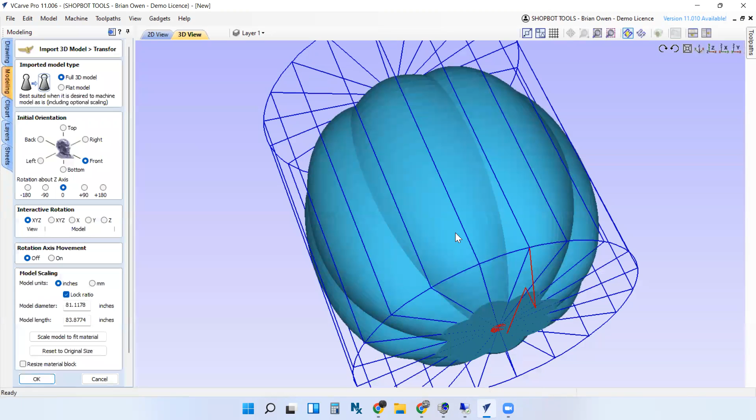I've actually gone out and found a 3D model of a pumpkin online for free, and I'm going to use that as the basis for my carving. So my first step is to import my pumpkin model. Here it is right here, and that opens up the 3D file import dialog. I'm going to scale this model to fit my material, to fit inside my 10 by 10 cylinder, and then hit OK to import my model into VCarve.

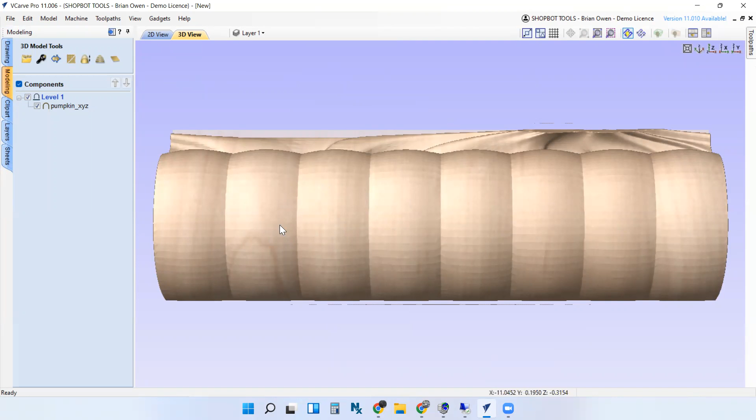So this doesn't look quite like a pumpkin, it kind of looks more like a caterpillar, but that's because the way VCarve interprets 3D models is it takes them, unwraps them, and lays them flat on a work area so you can plan out your cut. Then when you actually save the cutout, it wraps the cut back around a cylindrical shape and creates a rotary toolpath file. So all the cutting I'll be doing is on the surface of this unwrapped pumpkin shape.

The first thing, just to help with visualizing the shape we're carving into, I'm going to pretend like I have to cut this pumpkin shape out, which you wouldn't have to because your part would already be in the shape of a pumpkin. But I'm going to calculate a 3D finishing toolpath to create the pumpkin shape that we're going to carve into.

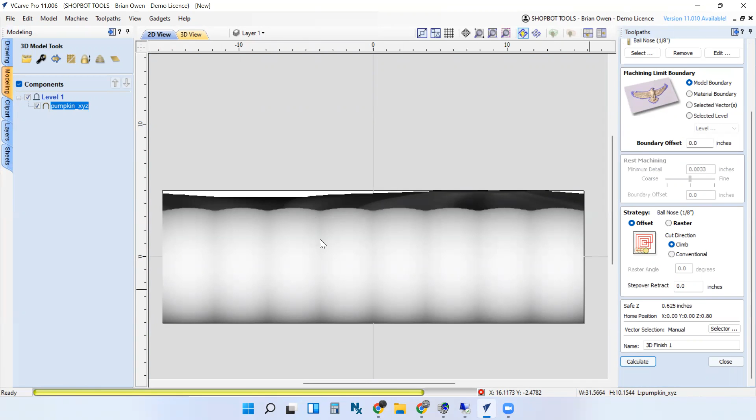All right, so that is how we would make our own pumpkin if we needed to. Of course, again, you don't need to. Now I'm going to add some text that I want to engrave into the surface of this pumpkin, so I'm just going to type in pumpkin test.

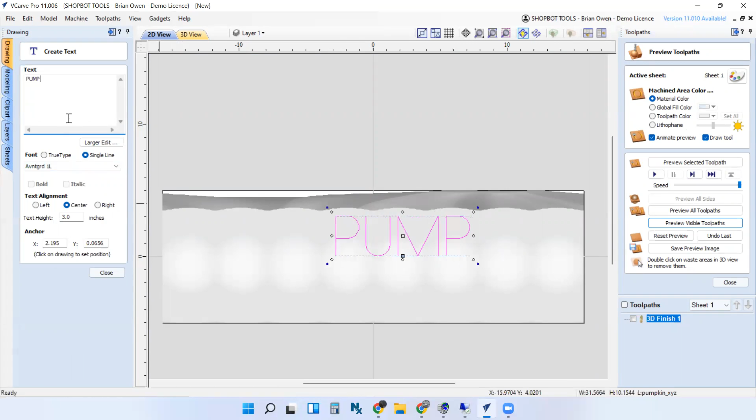And then center this text on our pumpkin and go over and choose a profiling toolpath. You can do a profiling toolpath, or you could pocket shapes out. From the photos you shared, it looks like mostly you're going to be doing straight line cuts following different shapes, so that would be a profiling toolpath.

I'm going to cut 1 inch into my pumpkin to make sure I get all the way through, and I'm going to cut directly on these lines rather than outside or inside of any kind of shape. The most important part is I need to check this box at the bottom that says project toolpath onto 3D model. That's going to make the cut follow the 3D shape that already exists in the file.

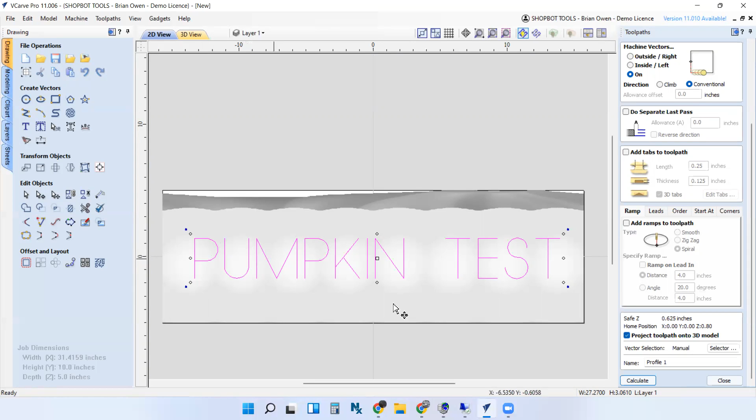So I hit calculate, and I can see these blue lines representing the actual motion of the tool following the curve and shape of our pumpkin. If I go ahead and preview this cut, I see that I've carved this text into my pumpkin 3D model. As I mentioned before, when this cut file is actually saved out of VCarve, it will wrap this shape around a cylindrical base again and actually carve this in the round on your rotary indexer.

So that's how easy it is to carve text and shapes into already existing 3D shapes in VCarve. Again, you'll just need some model that approximates the shape of the pumpkin you're carving into. And if you carve deep enough, you'll be sure to cut all the way through the surface of your pumpkin, even if it doesn't exactly match the shape of the model you've loaded into VCarve.

All right, I hope that makes sense, and let me know if you have any more questions.